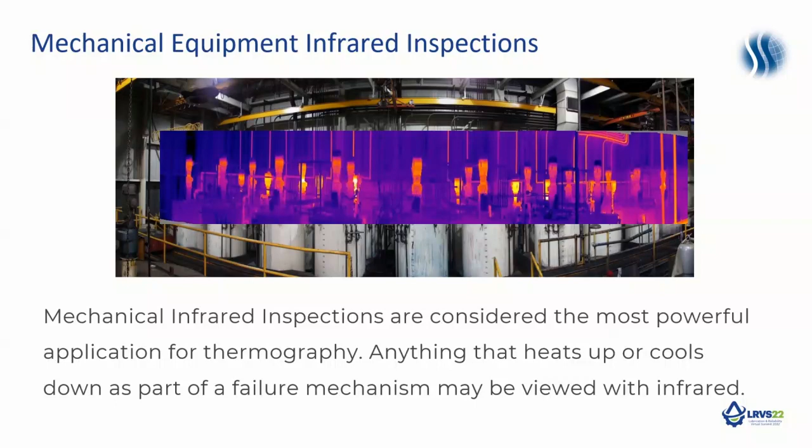In order to be effective at mechanical infrared, you need to understand radiometry and heat transfer and the operation of the machinery. You also need to understand the heat-related failure mechanisms. And it's not a real difficult task.

It's simply we're looking for thermal patterns. And here you can see that pump assembly. There's an obvious difference between the bearing housings on that pump. It's not a super difficult process in relative comparisons in a lot of cases.

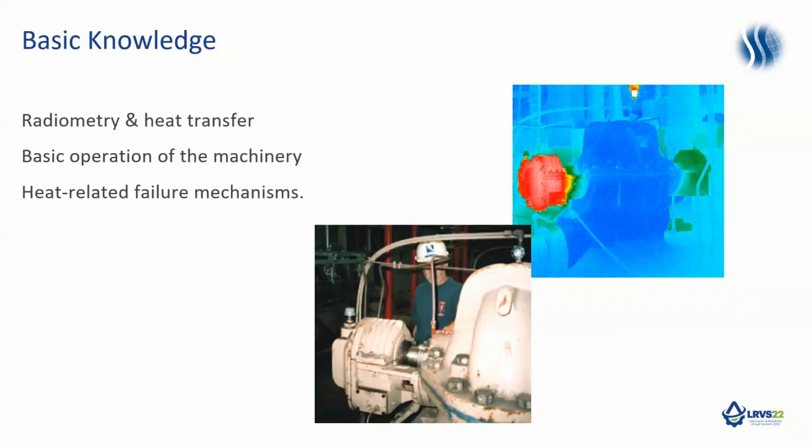So you start with a baseline on each piece of monitored equipment, and you trend from that.

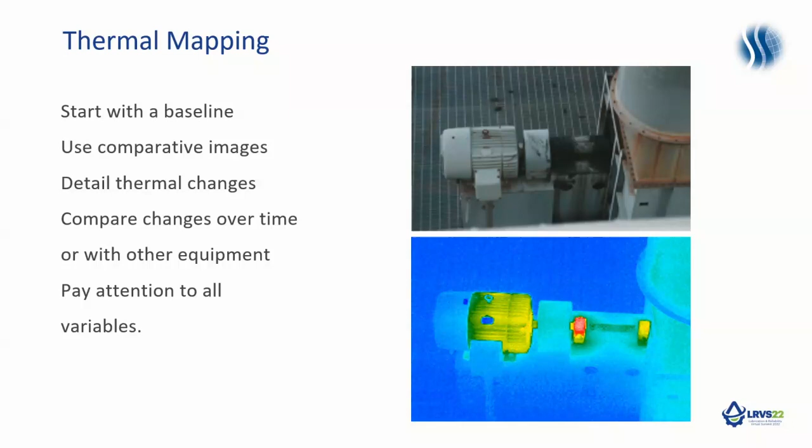Some of the things we can see, and believe me, this is a very small list. The list is considerable, and you'll probably be thinking of a bunch of things during the presentation. I'm not going to read the list, but we're going to cover a lot of this.

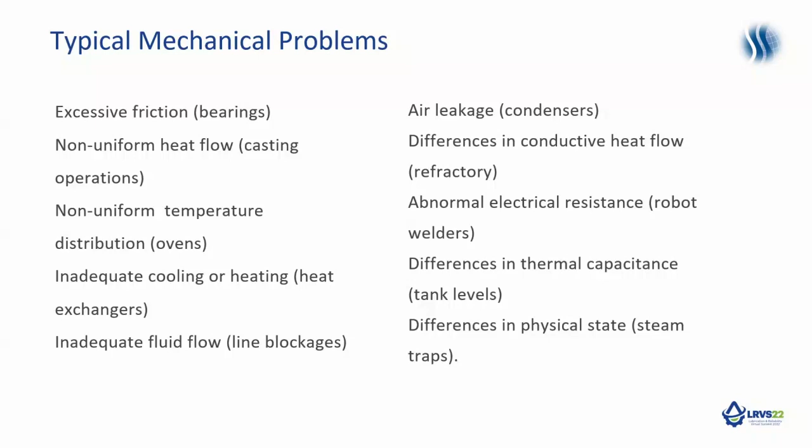One of the most critical things is motor bearings. Anything that spins or turns has to have something to mitigate friction, and bearings is a very common application for that. Some of the problems we can have with bearings is over lubrication. If you over lubricate a bearing, it's going to compact that grease in the bearing housing. It's going to cause excessive heat and friction.

Bearings can overheat for a number of reasons, and we can see that with infrared. Lack of lubrication is a common reason. Misalignment is another common cause of bearing heating.

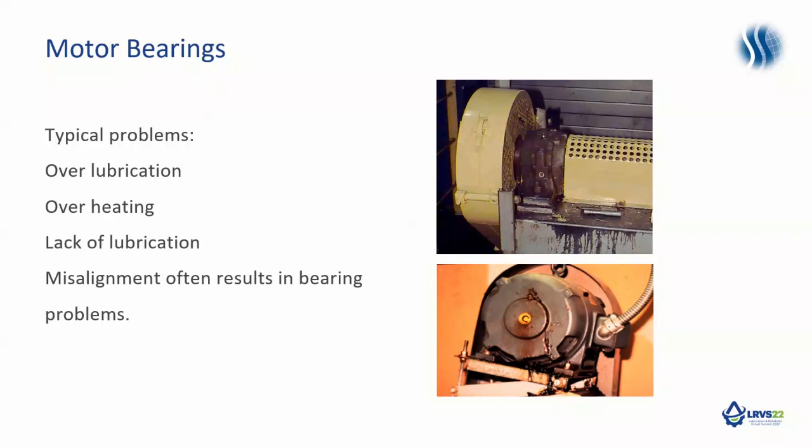Again, it's relative comparison. We can compare it with similar bearings on similar equipment under similar loads. If we don't have that ability, then we trend it to itself.

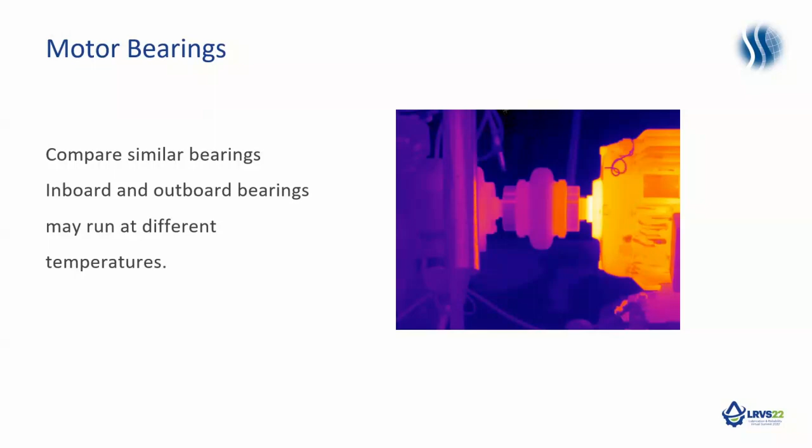Now, most motors, for example, are going to run around 140 to 150 degrees in most applications, and the bearings should not be much hotter. They normally run in the 140s or so on normal applications. There are reasons for variance, but...

There's going to be a difference between the drive end bearing and the opposite end bearing on motor applications, because usually on a fan cooled motor, the fan's at the back end, so it gets more convection. It's not going to be running as hot, but it doesn't have the enclosed area, so it doesn't contain the heat as well as the drive end of the motor.

Normally that's about a 10-degree Fahrenheit, 5 degrees Celsius variance in temperature between the opposite end and drive end bearing.

Another thing, when you put a new motor in, or one that has been rebuilt or rewound, it's going to have new bearings. You'll need to let it have a run-in time for about 24 to 48 hours, and the bearing temperatures are going to be about 16 degrees Celsius, or 29 to 30 degrees Fahrenheit, higher until the run-in period takes place.

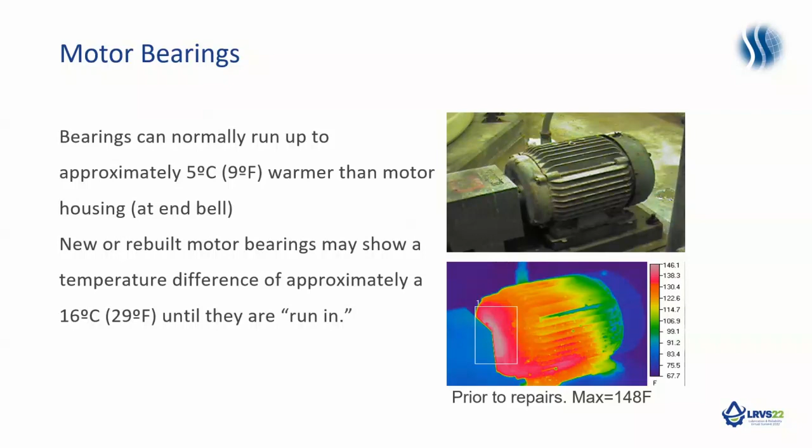On the bottom image here, you can see a motor, and that drive end bearing area is 148 degrees as the highest temperature. This organization determined that bearing needed to be replaced. So in the image on top, 148 degrees Fahrenheit, they replaced the bearing and let it run in for 24 hours, and you see about an 11-degree Fahrenheit temperature difference.

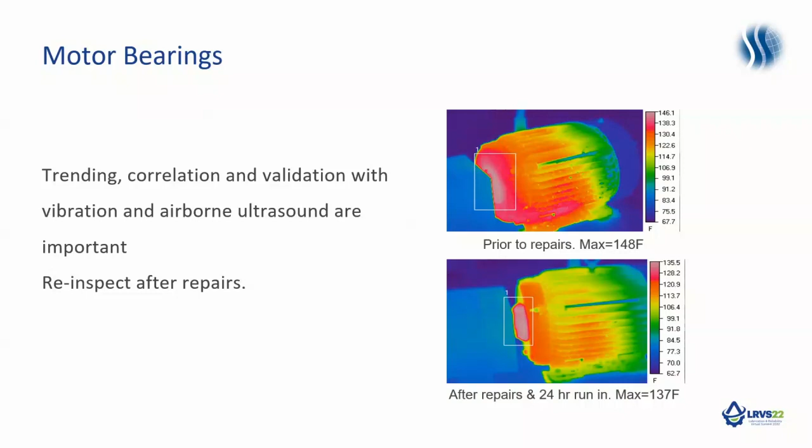So for motor bearings, trending and correlation validation with vibration and ultrasound is always a good thing to do. Very important: re-inspect after repairs.

Motors are a very common industrial application. Just in the United States alone, almost 25% of all energy consumed is consumed by electric motors. Now, IR is not a primary test method, but we can find a lot of things going wrong with motors if we look at them thermally.

There are other technologies: motor current analysis, motor circuit evaluation, and resistance to ground testing. If you do nothing else with your motors, I would recommend resistance to ground testing, because all the failure mechanisms with motors cause the motor to run hotter, which thermally degrades insulation. If you're trending the insulation, you can see degradation occurring as it happens.

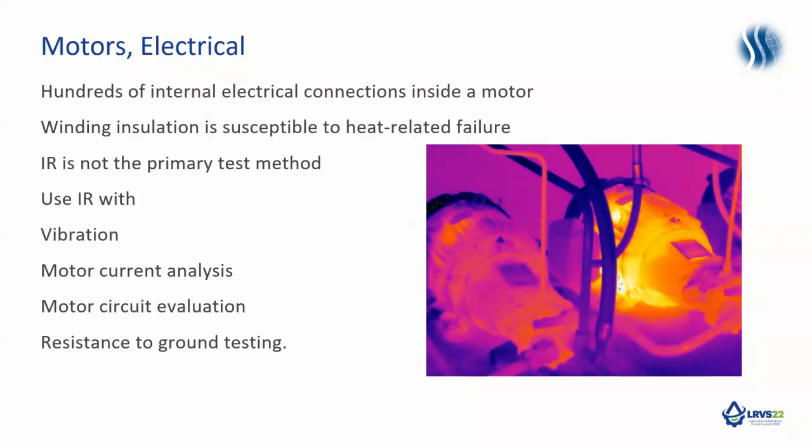Motors are rated by the thermal limitations of the winding insulation. NEMA used to have a bunch of different insulation classes and subclasses. Now they've broken it down to basically 4 classes.

A good rule of thumb for evaluating motor temperatures is that the exterior runs about 20 degrees Celsius, about 36 degrees Fahrenheit, cooler than the internal temperature. So if you use that as a guideline, it should keep you in the ballpark for monitoring motor temperatures.

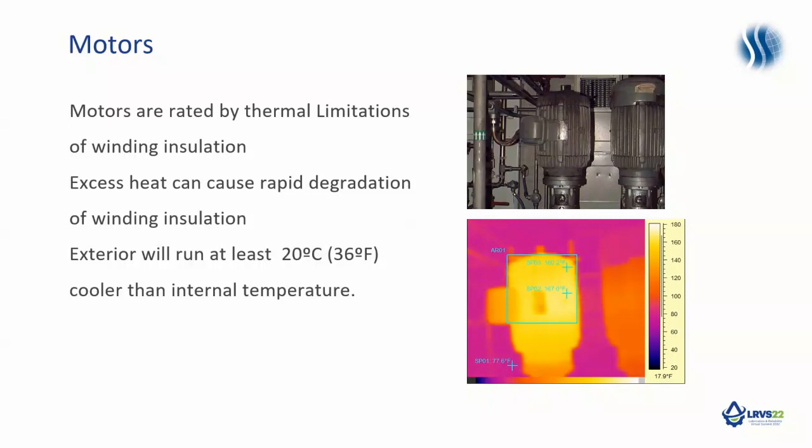NEMA has reduced the classifications down to 4 basic classes: A, B, F, and H. As you progress further through the alphabet, the insulation system can withstand higher temperatures. This chart shows internal and external temperatures in both Celsius and Fahrenheit.

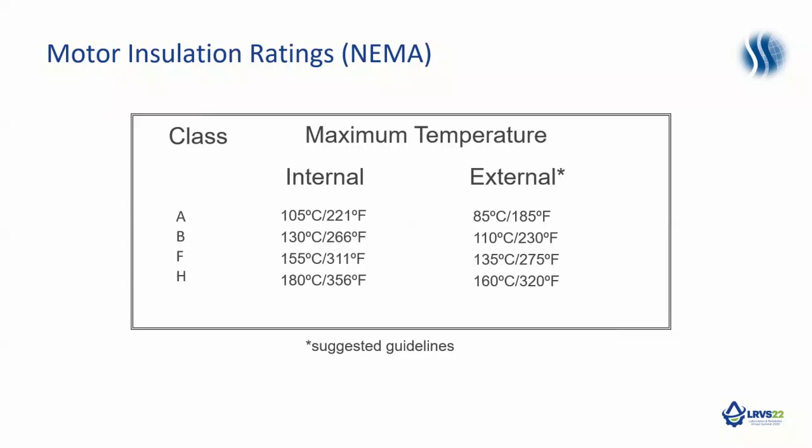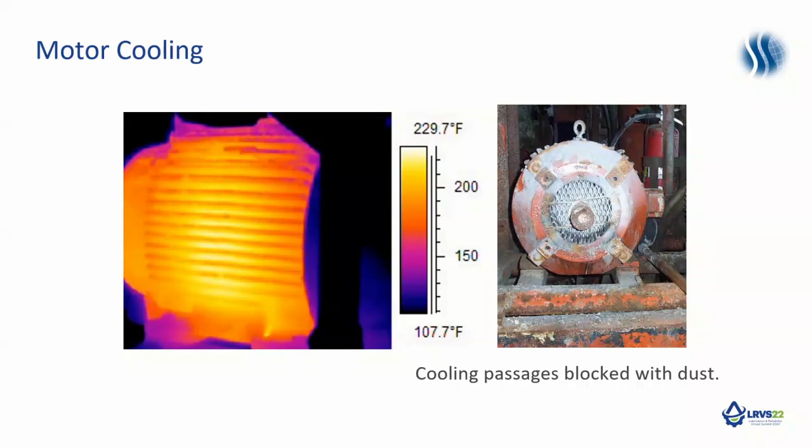Here you can see an open drip-proof enclosure motor, and the cooling passages on the right are all blocked with ambient dust. That motor is up to 230 degrees Fahrenheit. Again, it shouldn't be much more than about 140 to 150 in most applications.

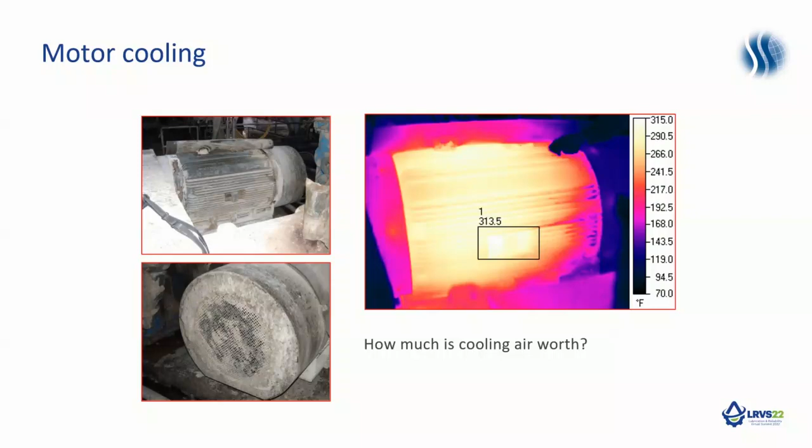You can see the fan shroud was all compacted, and the fan had come off the rear of the shaft. They shut it down for about 5 minutes, cleaned everything off, cleaned the fan shroud, put the fan back on, and the initial temperature was 314, or 156 degrees Celsius. Three hours later, it was down to 143 degrees Fahrenheit, so it went from 313 to 143 in a little over 3 hours.

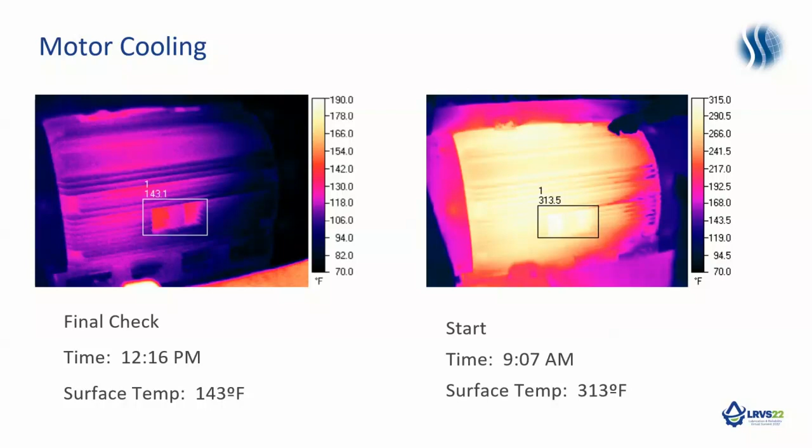Convection is very powerful and necessary for motors.

We have to get power from motors to whatever applications, and one of the most common ways is through couplings. We can tell a lot looking at couplings thermally. You need access to both sides, which can be quite difficult, but there are some ways to mitigate it.

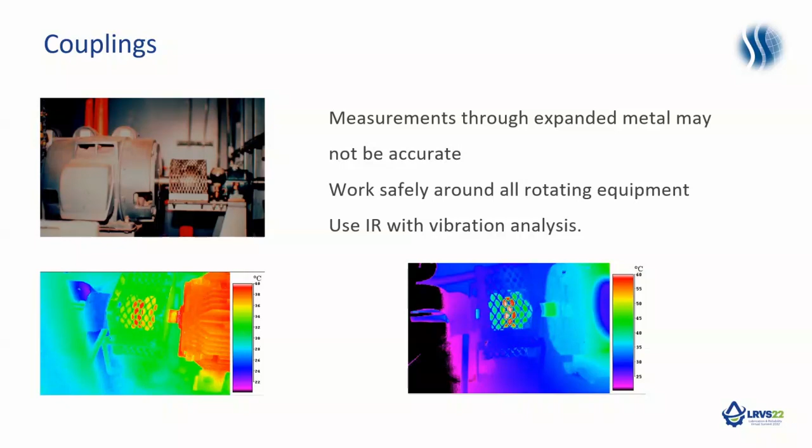Here you have expanded metal, and you can see you have a pretty much balanced temperature here. Some more images: if a coupling is out of alignment, heat can build up on one side, the other, or both. So it's very important that you get access to both sides of the coupling.

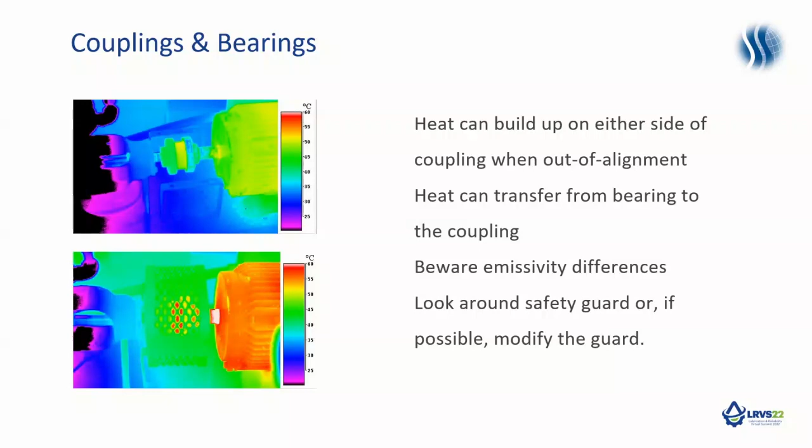You also need to be very safe working around rotating equipment. Here are more images of couplings.

Here's the classic signature. Look at the palette over here on the right: red and white up at the top, yellow and red in the middle. Using these rainbow palettes, you have to have good differentiation between white and yellow, or you can misjudge it. The image on the right is the coupling, and the problem is at the coupling. The image on the left, the problem is at the motor bearing.

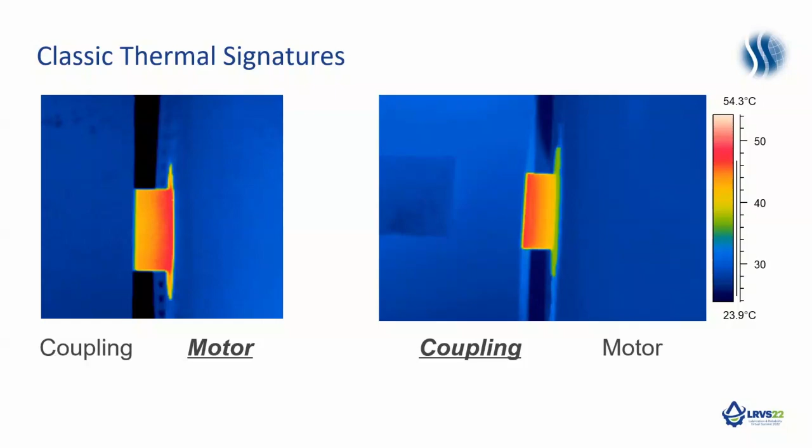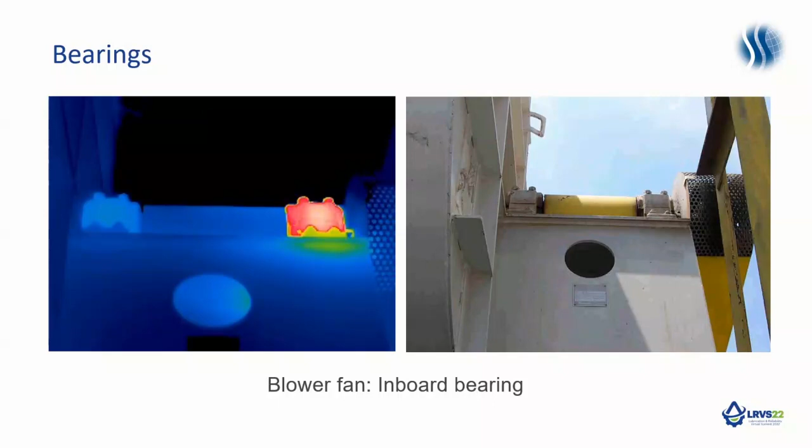Here are some pillow block bearings. You can see the inboard bearing on this application, and another one with the outboard bearing.

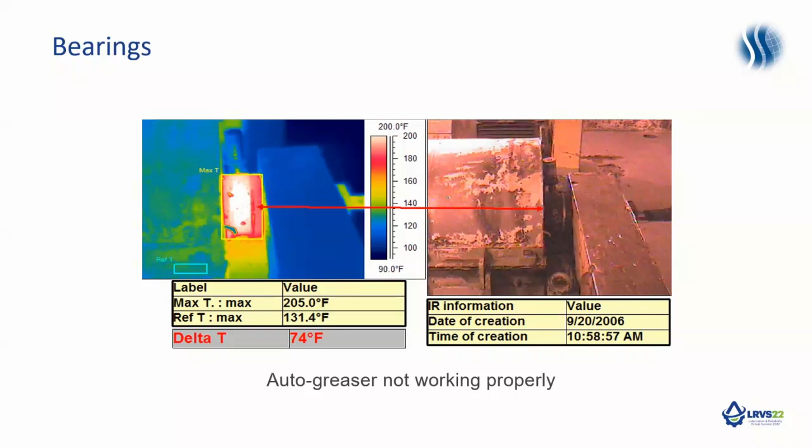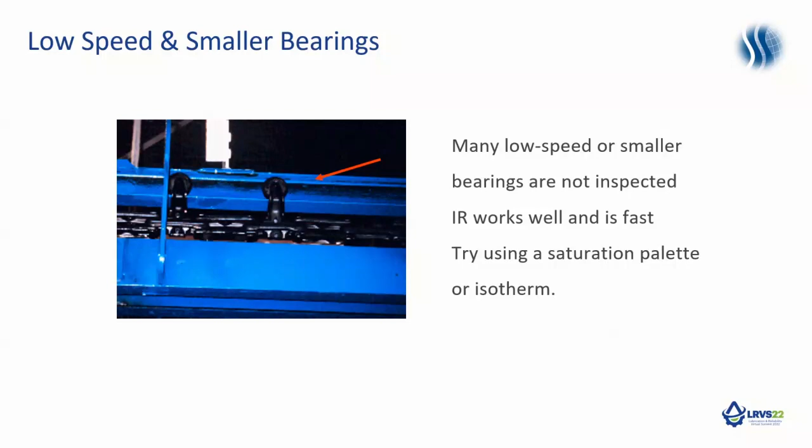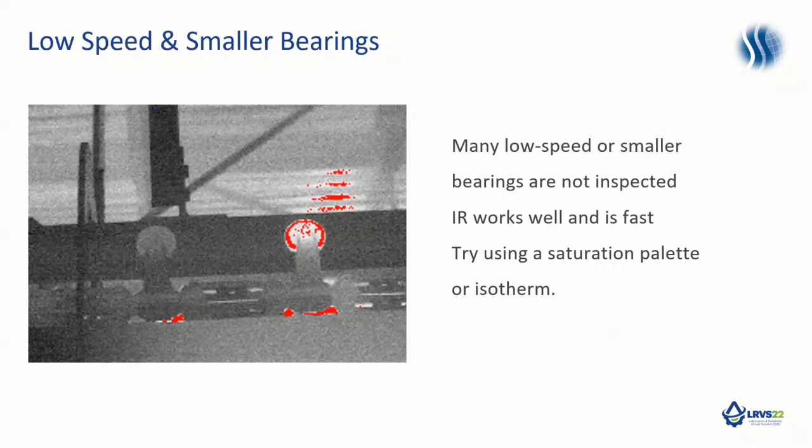Slow speed bearings are very difficult for vibration analysis, even getting access to them can be difficult, so it's an ideal application for infrared. We can use what we call a saturation palette, where we set it at a certain temperature, and anything above that temperature appears a certain color — in this case, red. So when we see that, we know the bearing is above our set point. This makes it very expedient to find bearing problems, especially on conveyors or in areas where vibration isn't practical. It's also a great application for confirmation with ultrasound.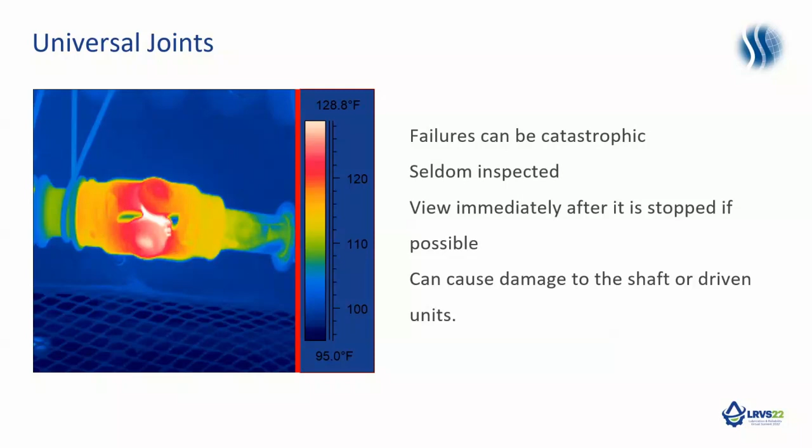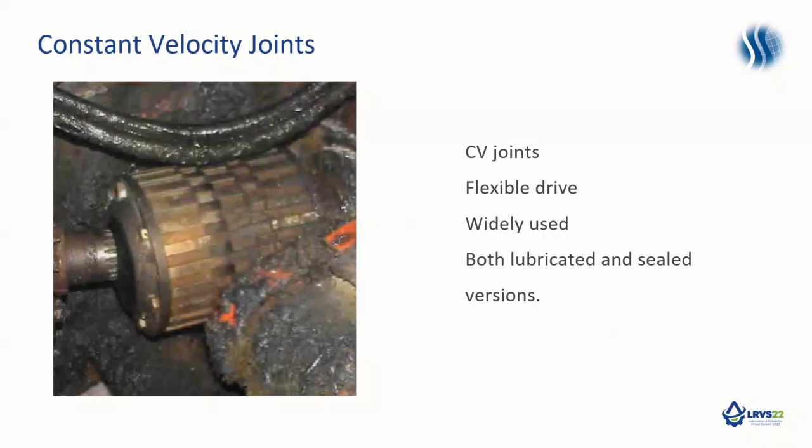Constant velocity joints are used in a lot of motor vehicles — front-wheel drive, all-wheel drive — but also a lot in industrial applications. Some are lubricated and some are sealed. Here's a great image of a failed CV joint. When these fail, the failures are usually rapid and catastrophic.

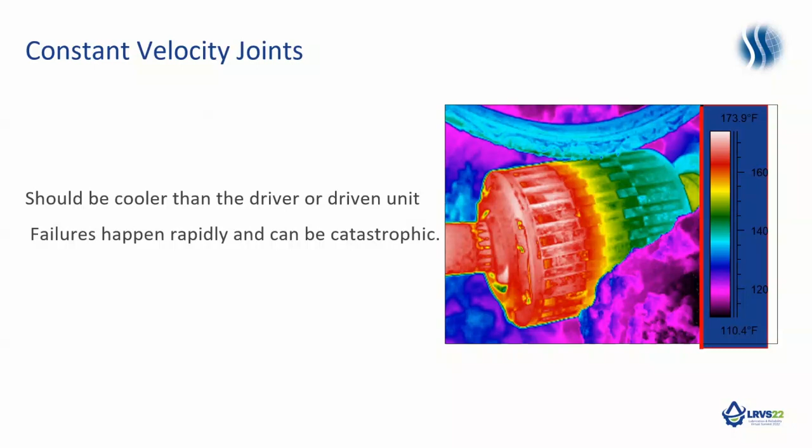Belts are another way of providing power to whatever we're driving, and there's not a lot that can go wrong with them. Here we have a belt driving a sheave from the driven sheave, and the majority of the belt at any instant is in the ambient air between the sheaves, so temperature should be close to ambient around the motor. We recommend setting an alarm at about 60 degrees Celsius, 140 degrees Fahrenheit. If we're measuring through a guard, we'll also be picking up part of the guard's temperature. You can also use vibration, strobe light, or motor current signature analysis to identify belt problems.

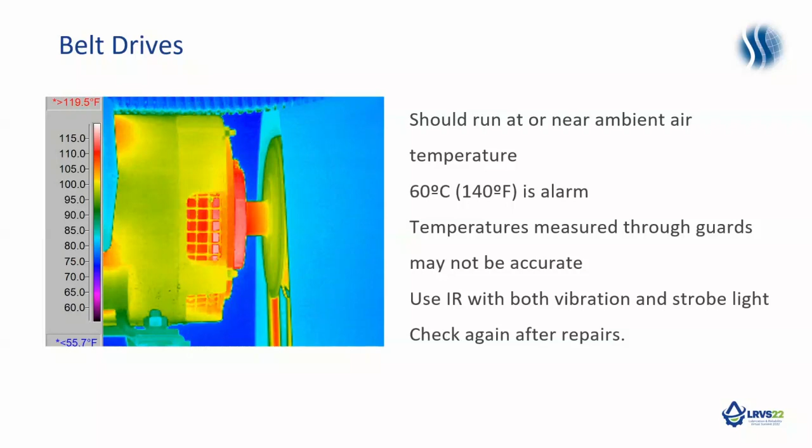When you look at these thermal images, you can glean a lot of information if you know what to look for. Look at this image — you can actually determine the direction of rotation of the motor if you look closely. Look at the top of the belt, then the side of the belt. It's a lot cooler at the top of the sheave and warmer at the bottom, which tells me that sheave and motor are rotating clockwise, viewed from this side.

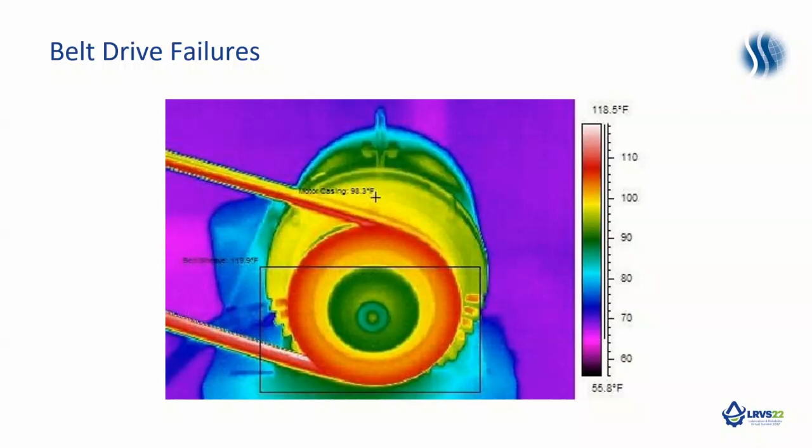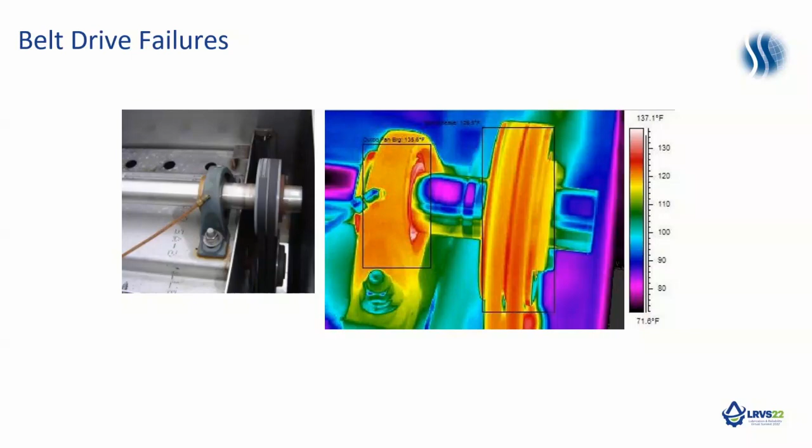Here's a pillow block bearing that went bad because somebody had the belt tension too tight. Do you use belt tensioners?

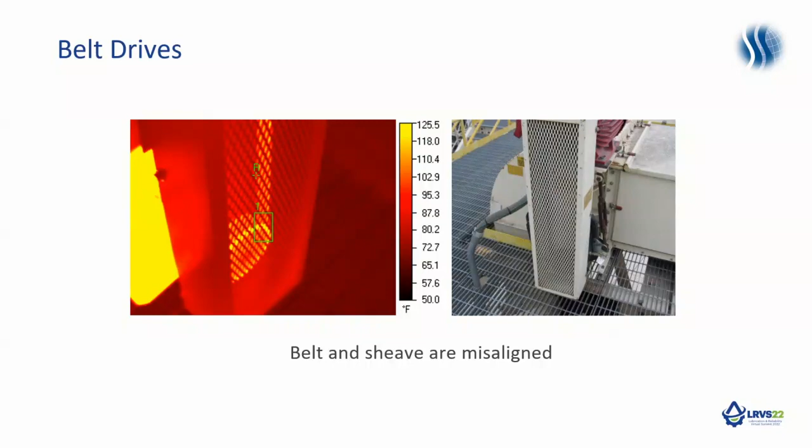Here we can see misalignment, and all I need to see is one sheave. Notice the outside of the sheave versus the inside — they're different temperatures, but they should be balanced. So this belt is rubbing more on one side, and on the top it's going to be just the opposite thermal pattern.

So here you can see another misalignment. Look at the outside of the bottom sheave versus the outside of the top sheave. If we look from the other side, it would be just the opposite.

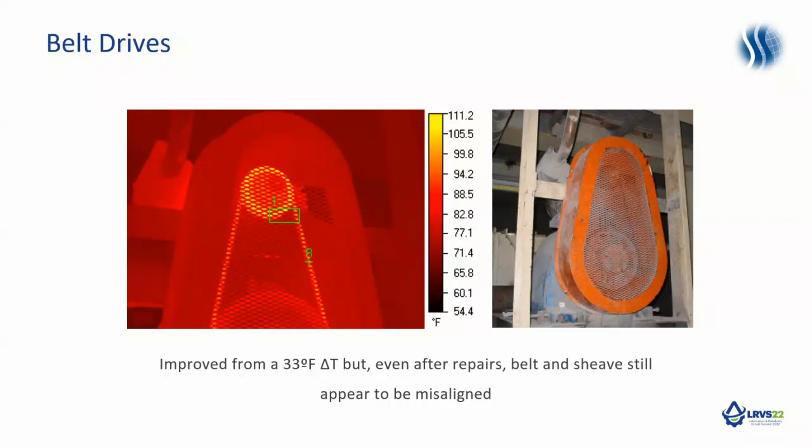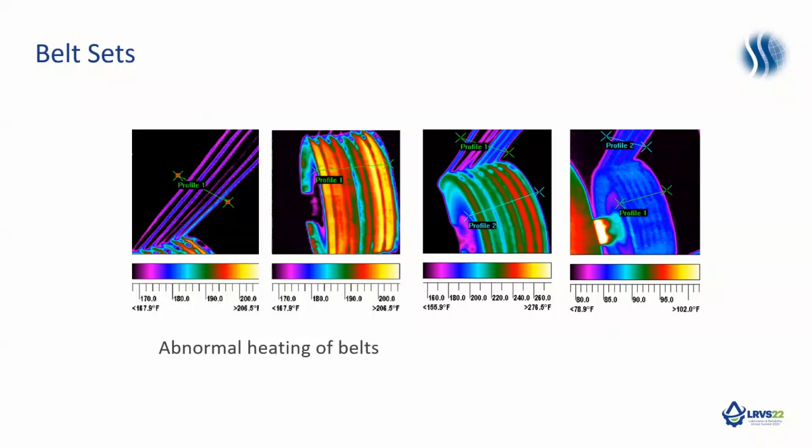Now it's greater than 276 degrees in the hottest area there. And here with a matched set, it's less than 102 degrees, which is pretty much what you're going to see on most belt applications in ambient conditions.

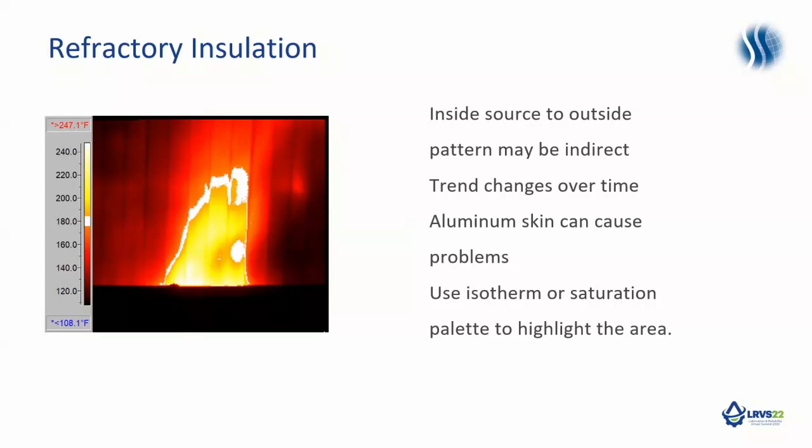Here we have a rotary kiln, which is lined with refractory brick. This thing spins at a very low RPM, and it's at an angle, transporting things from one area to another. As it rotates, whatever is in there will reach an apogee, and then it'll fall. That happens constantly.

Every now and then, whenever it falls, it'll break loose some of the refractory, and we'll get areas with differing thicknesses of the insulation, showing greater conduction on the outside. So we can monitor for a critical temperature, and when that gets approached, we know we have to go in and repair or replace that refractory insulation.

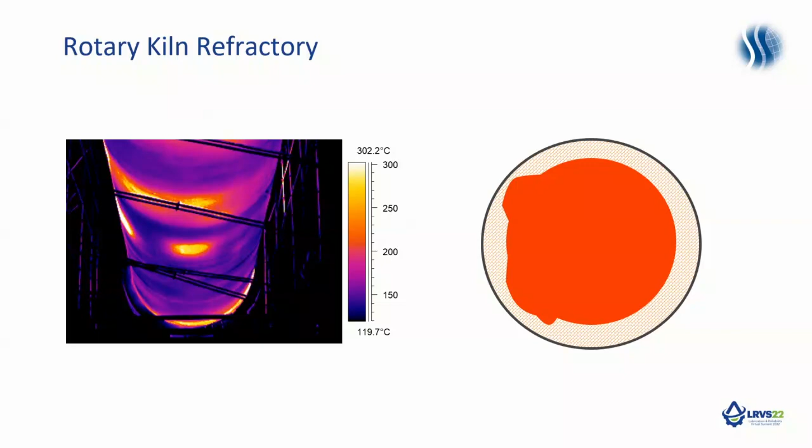Pipe insulation: a lot of pipes have insulation, and then it has a cladding. Now, if that cladding is aluminum, we're not going to see anything. Shiny metals do not give off thermal energy—they reflect the temperatures around them. We could paint areas of it and look at it that way, but if it's clad with plastic or something like that, no problem.

We're just looking for differences here. You can see there's some leakage of whatever liquid is in that pipe. The insulation's wet, and wet insulation conducts differently than dry insulation, so we can see we have a leak in that insulated pipe.

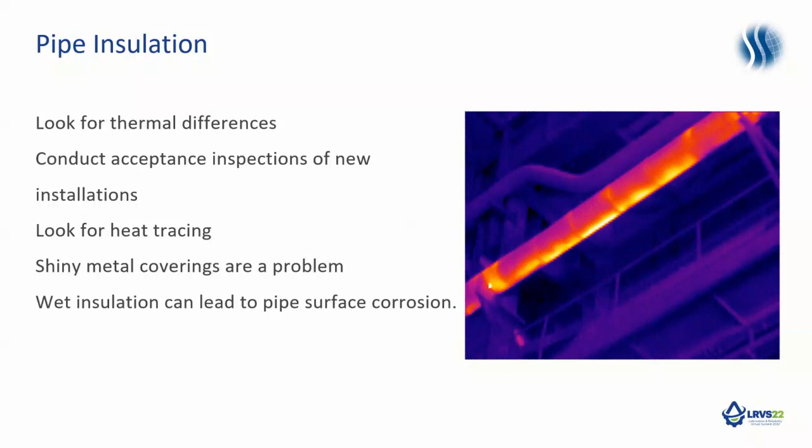Here we can see different tank levels. We're using the differing properties of water and air. Water has 3,500 times the thermal capacitance of air—in other words, it will hold and retain its heat much better than air does.

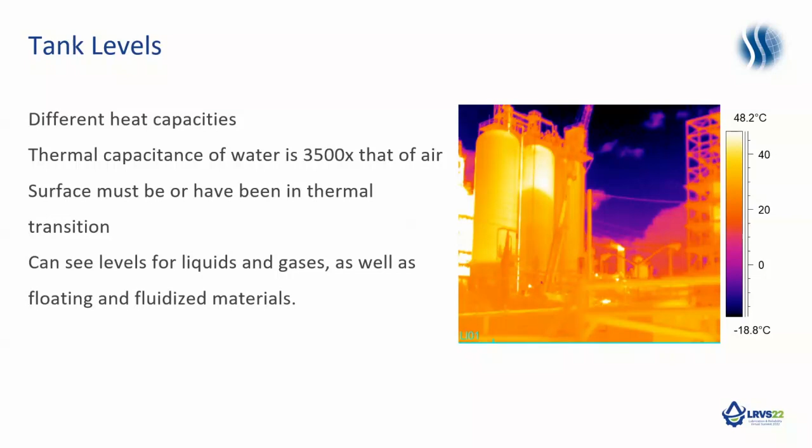So as soon as the sun goes down in the afternoon, giving the outer skin a little bit of time to change temperature, we can see the warm air at the top and the cooler liquid at the bottom. You see three different levels in those three tanks.

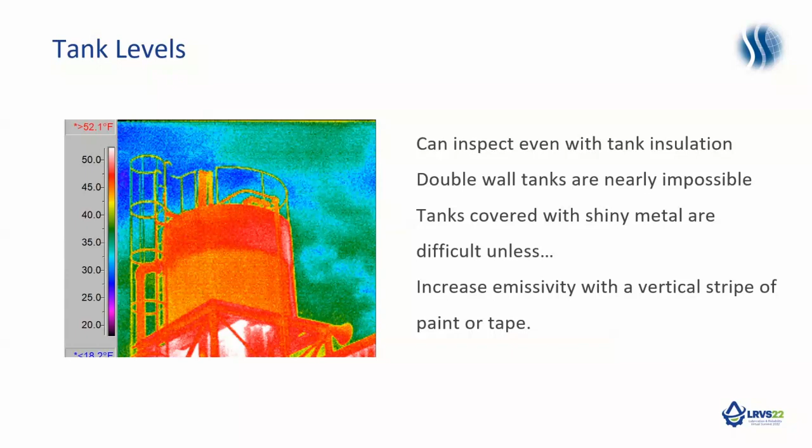Here you can inspect the tank even if it's insulated, but if you have a double wall tank, they're nearly impossible. Again, if it's a shiny metal tank, stainless steel or something like that, we can't see a tank level unless we do something to increase the emissivity of the outside—in other words, make it thermally conductive. If it's a small tank, we could put a strip of tape or paint a stripe on it to increase that emissivity.